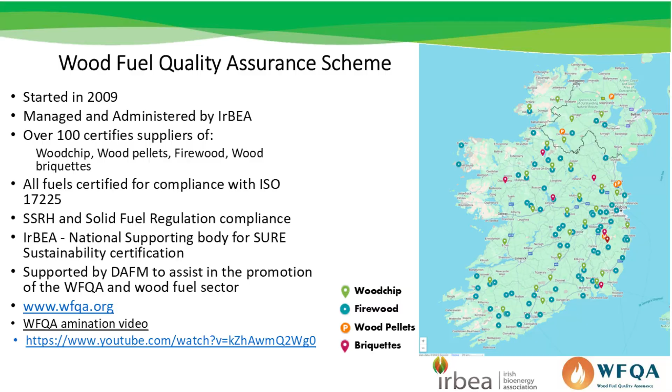Eugene already talked about the WFQA, which we are certifying now. I think it's 104 suppliers around the country of various forms of wood fuel. We've taken that on board as the national supporting body. That's in terms of both the quality side and the sustainability of supply, to ensure that can be guaranteed across the country. I'm going to skip that slide and go straight to this.

In terms of the importance of bioenergy across Europe, I think it's important to point out where we are on this. Generally, we're looking at heating and cooling. Across Europe, slightly less than one quarter of our heat and cooling demand is coming from renewable sources. So we're still very much reliant on fossil fuels. Within that, you can see the bioheat. Sorry, I have no pointer coming up there.

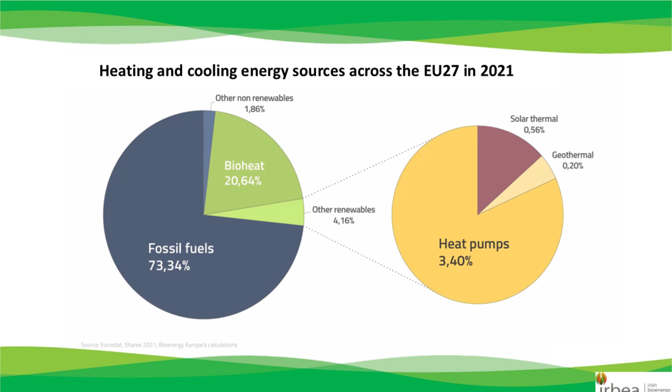But you can see the bioheat portion in green on the graph on the left: about 20% of our heat comes from bioenergy, and the other renewables make up the second graph here. You have heat pumps at 3.4%, and solar thermal and geothermal making up smaller percentages. But the predominant source of renewable heat and cooling across Europe is bioenergy, so its importance is very noteworthy.

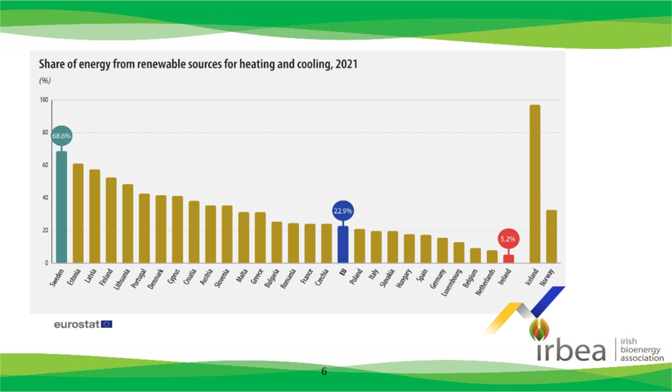Second, this is a graph country by country. The EU in terms of renewable heating and cooling is currently at about 22-23%. But unfortunately Ireland is right over here. We are number 27 out of 27 states, the worst on the continent, with 5.2% of our heat coming from renewable sources. You can look at it as glass half full or half empty for an industry, but there's massive potential for expansion here. We have the feedstocks, but it is something we clearly need to address.

On foot of that, a number of years ago, Renewable Energy Ireland, which is a conglomerate group of renewable associations, including ourselves, IrBEA, the Wind Energy Association, solar, geothermal and heat pumps, produced the 40 by 30 report. We've copies of it on the desk if you want to look at it.

We looked at the resources that are available in Ireland. It's really a snapshot of where Ireland is in getting towards 40% renewable heat by 2030 and how we could do that. Starting out, you can see that oil and gas are about 40% of all our heating needs at the moment. So we have a lot of room for expansion, and they're the two key fossil fuels that we use.

What was interesting in this report, and I've only one slide on this but it's well worth reading, is that we actually have sufficient resources practically available today to more than meet all our demands on heating from various different sources, be it biomass, be it spare heat through district heating, through electrification. I think 55 terawatt hours is our total heat demand, and we can meet all of that with resources already available in the country. So it's a very interesting report.

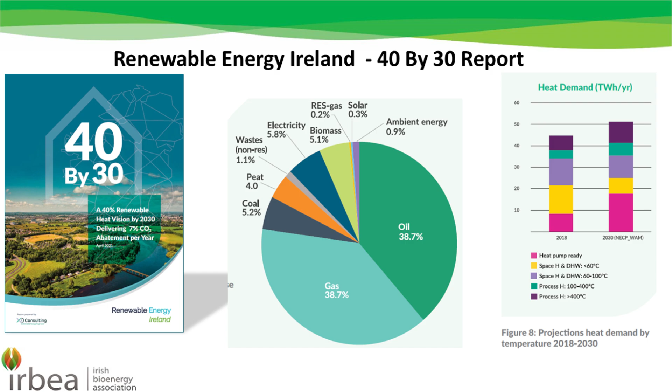The bar chart on the right hand side there, within that report, breaks down the heat requirements into a temperature profile, because it lends itself a lot to what technology is most suited. Really this conference today is focused on the top two there, the somewhat green and purple colours on the very top, which are process heat from 100 degrees up to 700 or 800 degrees Celsius. So it's really where you're looking at steam, thermal oil or high temperature flue to do your heavy lifting, whatever the industrial process is.

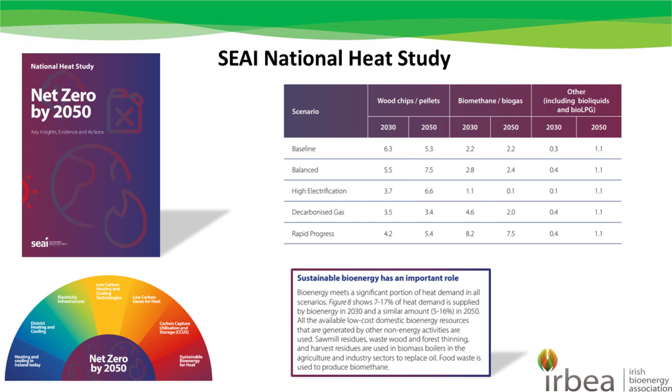Shortly after that, the SEAI produced their National Heat Study, a very good and similar report looking at where we can meet our target of zero fossil fuel being used for heating by 2050. Within that, it again supports the idea of bioenergy, depending on the different scenarios they ran, contributing between 5 and 16% of all our renewable heat coming from biomass by 2050, which is similar to numbers we see coming forward.

It is worth noting in many different reports, including the National Energy and Climate Plan published last year, that biomass heating is more cost effective than heat pumps in terms of cost per square metre and in terms of cost per tonne of carbon emissions saved. So it does have some distinct advantages, particularly in the high heat sector where high grade heat is required, and the indicative costs can be as low as 4.2 cents per kilowatt hour.

Obviously there's a high capital cost, and there are other considerations to be brought to bear, but its advantages are clear there.

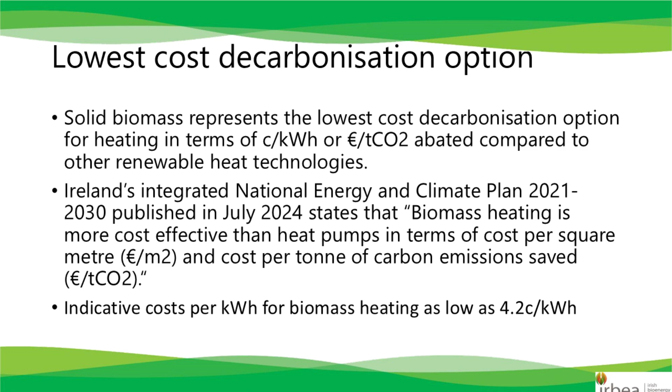We have a levelised cost of heat study which we're running at the moment. In the industrial modelling part of that, we looked at an industrial heat user that uses 9,000 megawatt hours per year, relatively small, needing 150 degree heat. We looked at 5 scenarios: replacing oil or gas beforehand with wood chip, a high temperature heat pump, a new condensing boiler with fossil fuel (still using fossil fuel but a more efficient boiler), using HVO, biomethane, or a wood pellet furnace, and what the scenario would look like there.

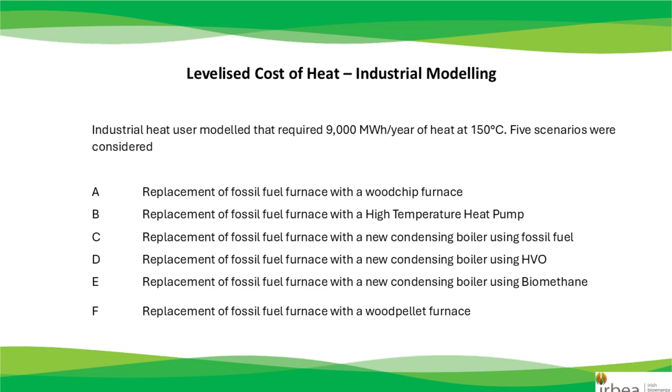We're not going to go into too much detail on that, but it will be on the slide deck for you afterwards if you want to have a look at it.

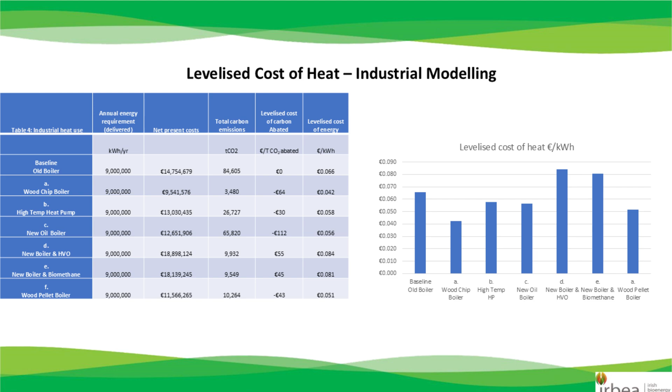It's worth noting, and it will be in the report we're putting out with this, that the cost per tonne of carbon is really interesting to see, because generally when you're using biomass, you've got practically a 100% reduction in carbon emissions from your heat requirements. So it's a good report to see.

And then I just want to go into a couple of examples. We decided that because we have an audience here today of people who may not have come across biomass before, we'd just give some examples of what's out there and what is available or existing. So there are a number of large biomass plants across the country.

We've picked out five examples here in detail. First, Danone, in operation since about 2011, a 4 megawatt biomass plant with a steam boiler. It's the world's first certified carbon neutral plant to make baby food, in Wexford.

Astellas Pharmaceutical, where Daniel Walsh is actually on one of the panels later on. Around 2012 they put in a 1.8 megawatt steam boiler, and now they're building a second, brand new plant in Tralee, also putting in a biomass steam boiler, showing some good experience on it.

Aurivo will be on the panel later on as well. They have a 10 megawatt biomass steam boiler for dairy processing in Roscommon. And then Laois Sawmills, somewhat within industry, have an 8 megawatt biomass furnace for the production of wood pellet. So just some examples.

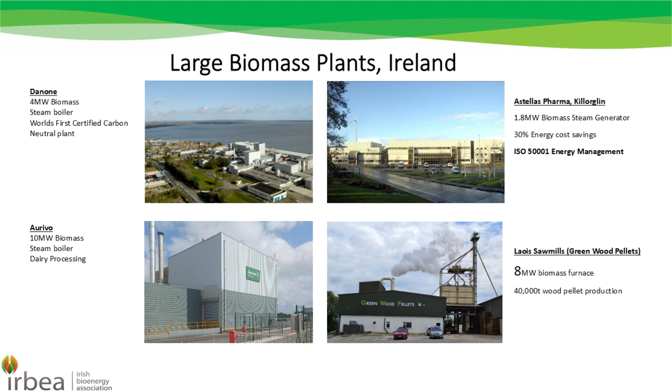Another example is Horeswood Nurseries in Wexford, a 2 megawatt plant. The capital cost was just over €500,000. It's been running a number of years now, saving up to €250,000 a year on fuel costs, so the payback was considerable. That was largely because they were using high cost LPG, which usually has a higher cost of production. But again, it's an excellent example of what can be done.

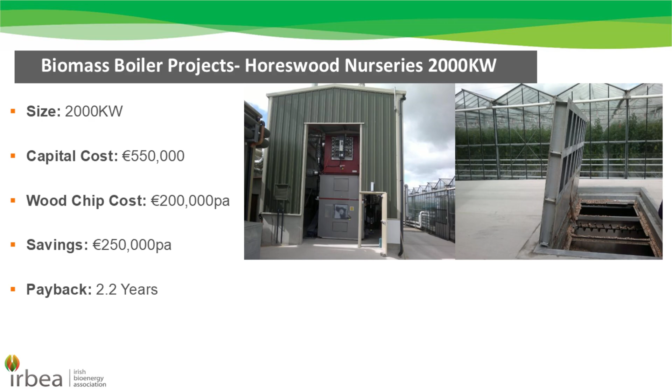We asked a number of our exhibitors here today if they would send on some example slides, to give examples around Europe and around Ireland, so we can show people a flavour of the different industries that can be supported through the use of biomass.

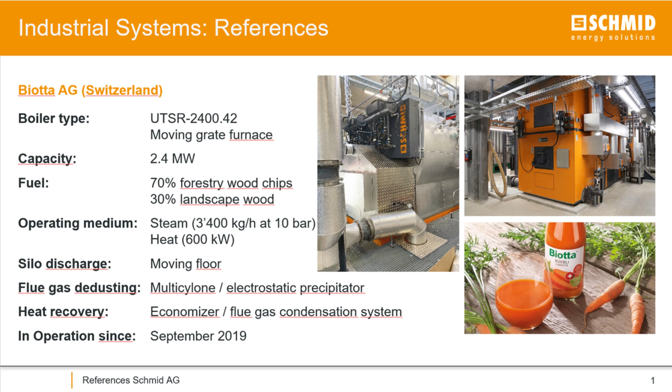First up would be Schmid Boilers, who are over here to the side. They sent a couple of examples: a 2.4 megawatt plant, for organic fruit and vegetable juices, using 10 bar steam at 3.5 tons per hour in a 600 kilowatt boiler. That's been operational about 5 years at this stage.

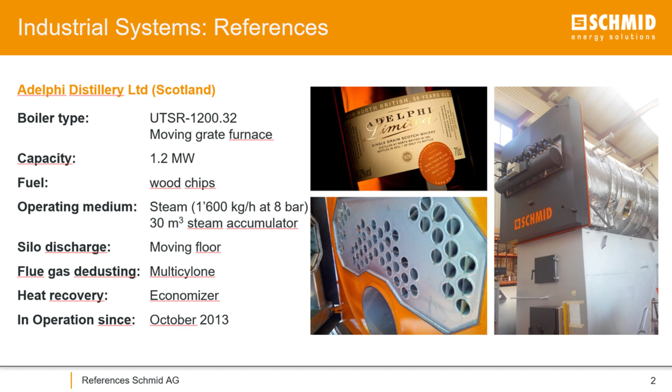A distillery, and you'll see quite a few of those here, with a 1.2 megawatt plant running on wood chip, at 8 bar pressure steam, 1,600 kilograms per hour. Again, more in terms of the high-end use of the heat.

Schmid are over to the side there, and they're agents here as well, based in Ireland, but it's a Swiss company, manufacturing for many years at this stage. The last plant from them is a pellet plant running at 115 degrees Celsius, for another brewery in Switzerland.

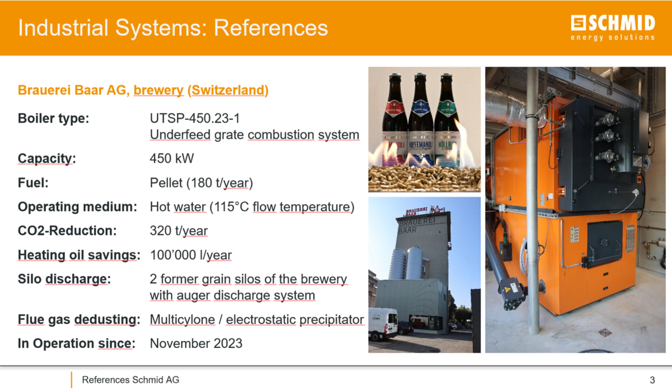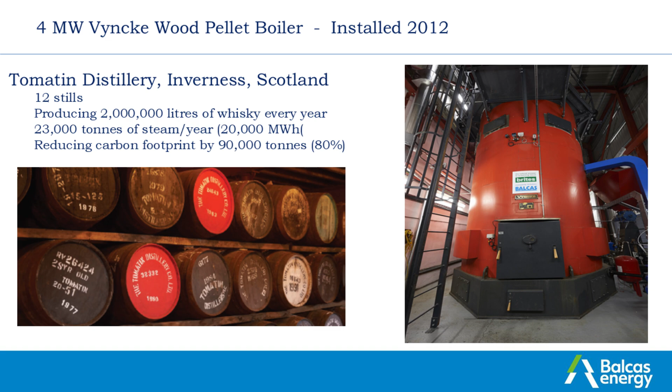Next, Balcas, one of our sponsors today. Here we see a Vyncke wood pellet boiler, again for distilleries, which we've seen quite a lot of in Scotland. The Scottish distilleries and breweries have adopted biomass in a large way. This is a very good installation, installed 13 years ago and still running very well — Tomatin Distillery in Scotland.

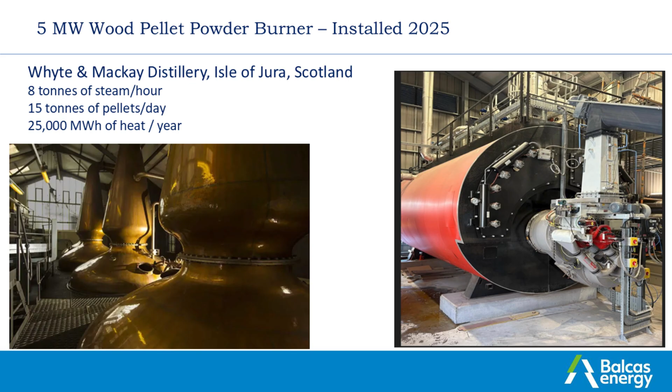Another example, and you'll hear a lot more about it later from Balcas in their own presentation, uses what's termed a powder burner — they grind the pellet back down into powder. We've seen a number of examples of this coming on stream in recent years; using a particular type of burner gives a lot more responsiveness, so if you have a demand with lots of peaks and troughs in steam or heat, it can adapt rapidly to that change. The technology isn't new — we've seen plants over 10 years old using it — but we're seeing a lot more emergence of it for particular plants.

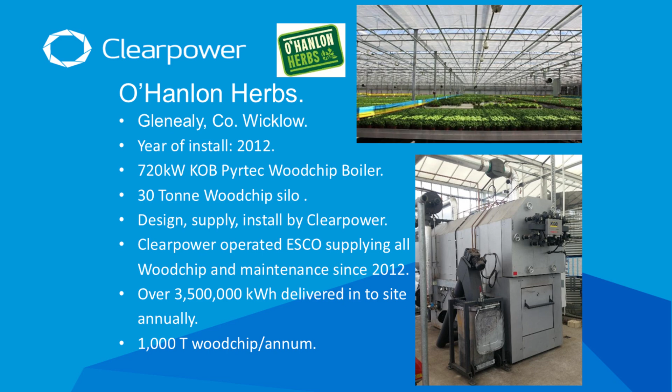Clearpower, down at the back, has a number of installs around Ireland. One example they shared is O'Hanlon Herbs — apologies, I thought there was a photograph on this as well — a 720 kilowatt boiler operating since 2012, using a significant amount of wood chip per year.

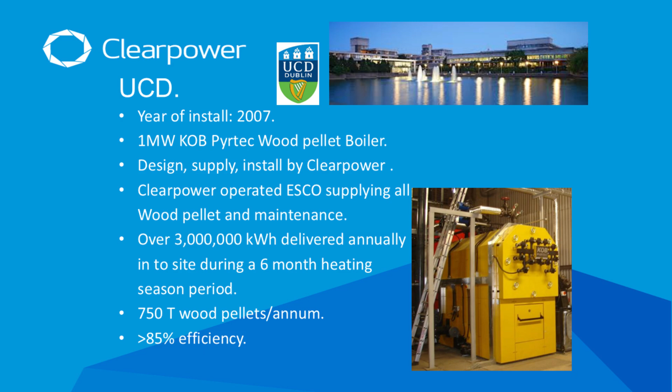Again, it's in the food and service industry where we see quite a lot of use. UCD, one of the largest universities in the state, installed a 1 megawatt biomass boiler in 2007, which runs a district heating system around the campus. The campus is somewhere like 150 acres. All of the buildings are on one heating network, and they get a lot of their heat from that biomass plant on site. So another good example there.

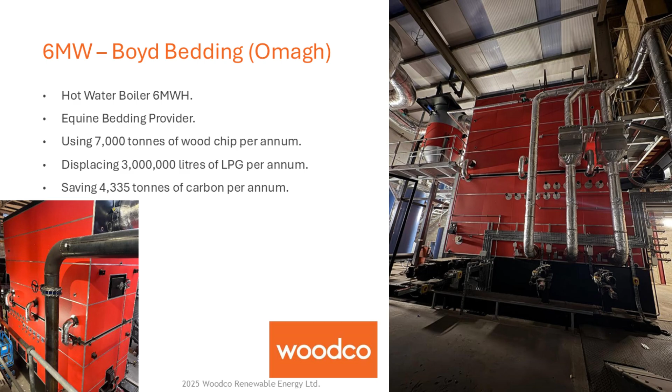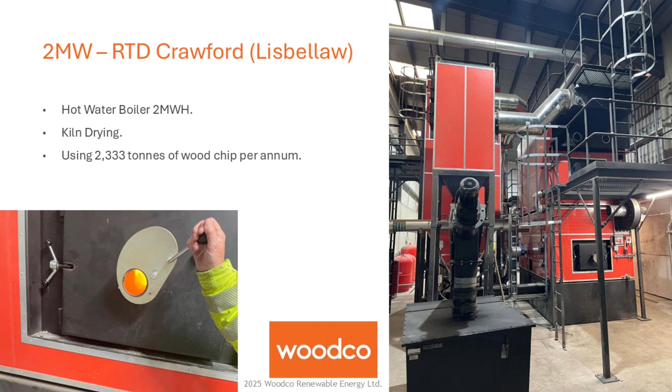Woodco, in the back corner, give some examples there. Boyd Bedding in Omagh is a 6 megawatt plant running on wood chip, making bedding for livestock and for the equine industry, with quite a large energy demand on site. Another animal bedding company, RTD Crawford, is a 2 megawatt plant, again using wood chip. So Woodco in the back corner do those.

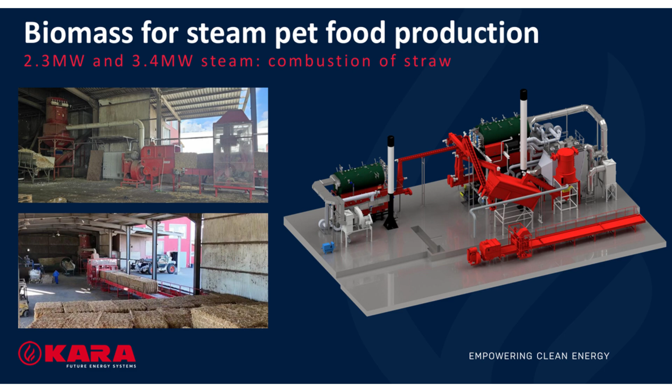KARA, a company from the Netherlands, have quite a number of plants built here in Ireland. One example is a steam plant for pet food production. What's interesting is it uses straw as its feedstock, so we're not always reliant on wood. There are many streams you can consider in biomass. Sometimes they're a byproduct of your actual process, as we see in the sawmilling industry, but other food production industries can also have a feedstock that's one of their byproducts that can be utilised. That's a good example of something similar.

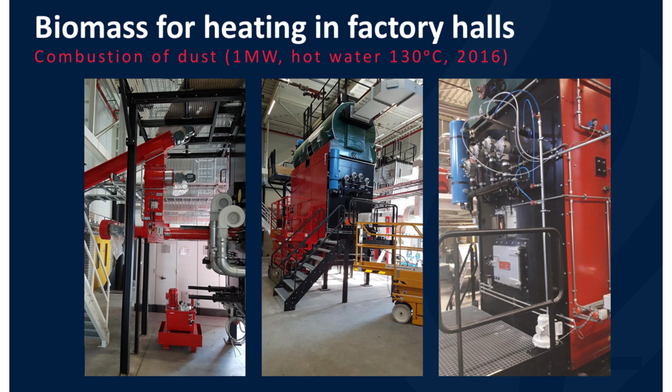They also do combustion of dust type pulverised dusts where you get that responsiveness. There's an example of a 1 megawatt plant at 130 degrees Celsius, and that plant has been running about 10 years.

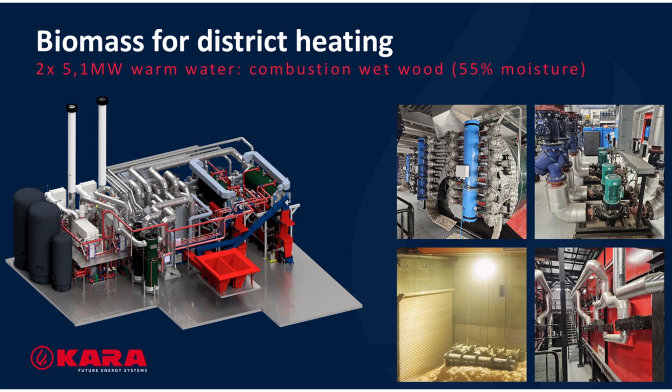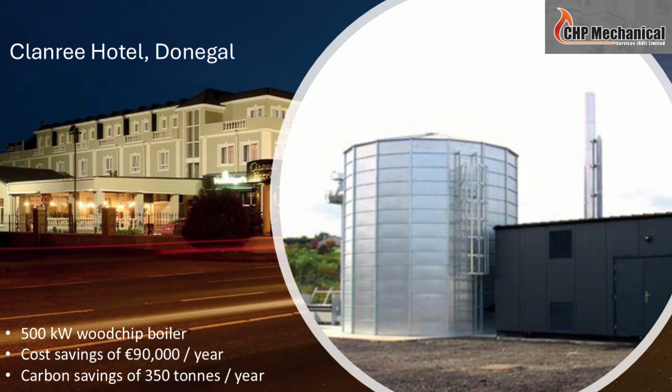Finally, the district heating on this plant shows the versatility we see with biomass. They're able to run with wood at 55% moisture, practically directly off the tree or out of the sawmill, right after harvesting. With larger scale plants, especially at 5 megawatts, you can put it into any large user - you don't need to dry the material because the plant is well able to handle it.

That's for district heating on a town. We see a lot of these systems across Europe, not so much here in Ireland. We would like to see more of them.

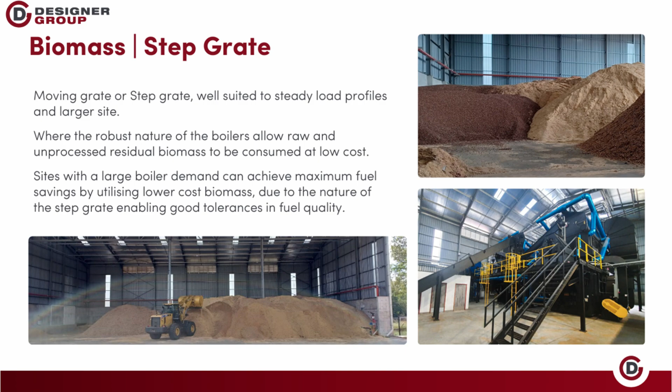Designer Group, over in the corner - Kenny McCauley will be on the panel later today. They have various experience putting in plant in Ireland, Scotland, and I think we have an example from Africa, where they have a number of examples. A various range of feedstocks they've been able to use, especially in some African plants with various feed streams coming towards them. That one in East Africa has quite a lot of different materials coming from different directions, and they've managed to find 40,000 tonnes locally to use.

That's the one thing about biomass - it tends to be a local product. We have seen some import and even some export from Ireland in terms of biomass, but generally it's a bulky product, usually kept relatively locally.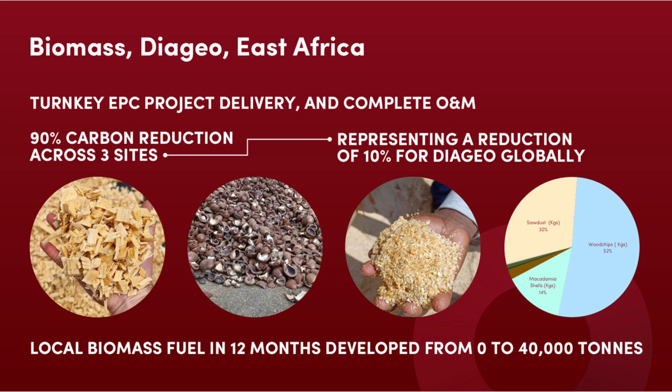They've also worked with various clients to look at powder burners. They tend not to be wedded to one technology - it depends on what the client requires. That Designer Group tends to work with.

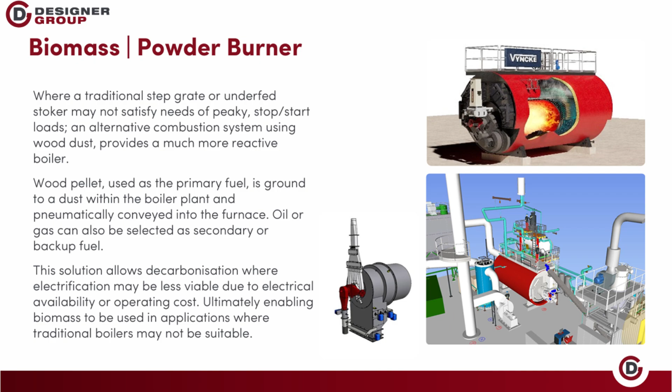That's a snapshot. Now, I did have a slide from CHP Mechanical, sorry we didn't get it across. CHP Mechanical do a number of plants around the country - they're one of our more experienced companies. Apologies for not having the slide up, but we know the company very well, and they've done a number of large installations, particularly in the hotel sector, and in some industrial and service industries across the country. So that's all, thank you very much.